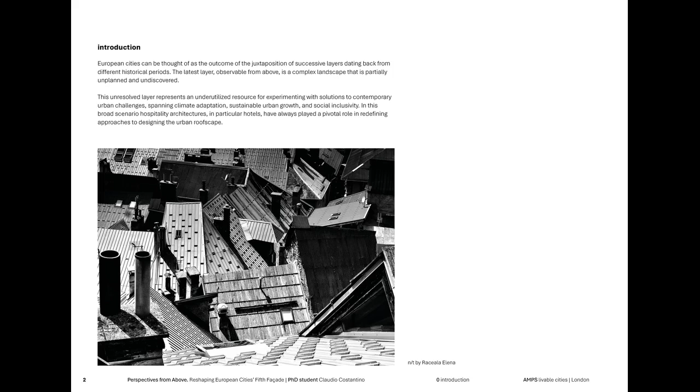We will explore this subject in two distinct main parts. The first section offers a comprehensive analysis of the current state-of-the-art in roofscape design. Through a selection of recent studies, we will examine the potential for transforming the underutilized fifth facade of contemporary cities.

The second part shifts its focus to hospitality projects. By analyzing a series of relevant case studies, we aim to establish a preliminary critical taxonomy. This framework will serve as a foundation for the development of practical guidelines for the redesign of fifth facades in our tourist cities. Our examination will pay particular attention to how these elevated spaces have become a platform for innovative design and the exploration of new social roles within the urban fabric.

This investigation is driven by two central concerns. Firstly, the pressing issue of environmental sustainability necessitates the efficient utilization of existing urban space, thus mitigating land consumption. Secondly, the growing demand for more livable, inclusive, and socially sustainable cities compels us to reimagine the potential of roofscapes.

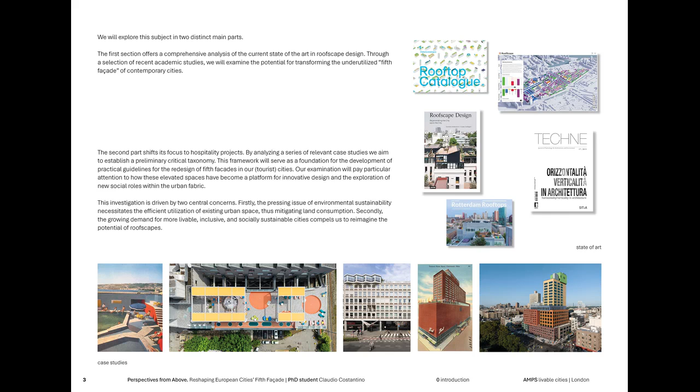State of the art: Gustavo Ambrosini and Guido Callegari in Roofscape Design, Regenerating the City upon the City, provide a survey of city rooftop reuse strategies such as building on and integrating new volumes within existing buildings.

24 case studies illustrate a multiplicity of projects that innovate on traditional typologies by offering multiple ways of living, working, and using public services in the city.

The opening chapters delve into the potential for rooftop living. The authors explore various building types, examining how architects have adapted them to incorporate new uses and spaces on their roofs: historic residences, housing complexes, factories, service buildings.

To further understand rooftop design approaches, the authors introduce three key architectural metaphors. Distance: this concept emphasizes the idea of rooftop living as a detachment from the ground floor experience, offering a unique perspective and escape.

Raising the ground: this metaphor envisions the rooftop as an extension of the ground floor, creating a seamless connection between indoor and outdoor living. Naturalizing the roof: this approach seeks to transform the rooftop into a green haven, blurring the lines between built environment and nature.

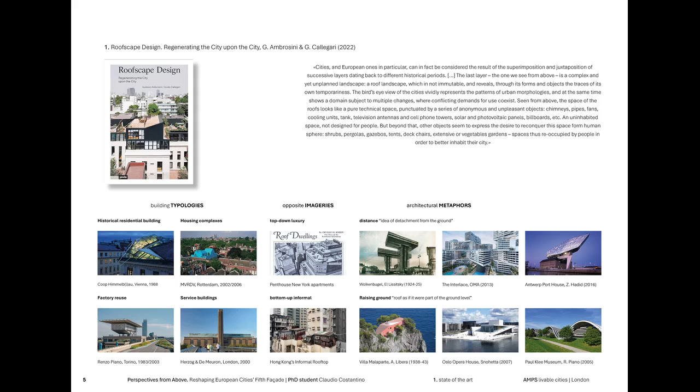Rotterdam boasts a unique urban landscape characterized by 14.5 square kilometers of flat rooftops. Shaped by the city's dynamic past, this roofscape presents a significant opportunity for sustainable development. Recognizing this potential, the Rotterdam municipality commissioned De Urbanisten to investigate the possibilities of transforming these rooftops into multifunctional spaces.

De Urbanisten's research framework categorizes rooftops based on their functionalities, employing a color-coded system, further elaborated by MVRDV years later. Green: lush vegetation provides ecological benefits. Blue: these roofs capture rainwater, mitigating urban flooding. Yellow: solar panels generate clean energy. Red: designed for active human use, these roofs become social spaces.

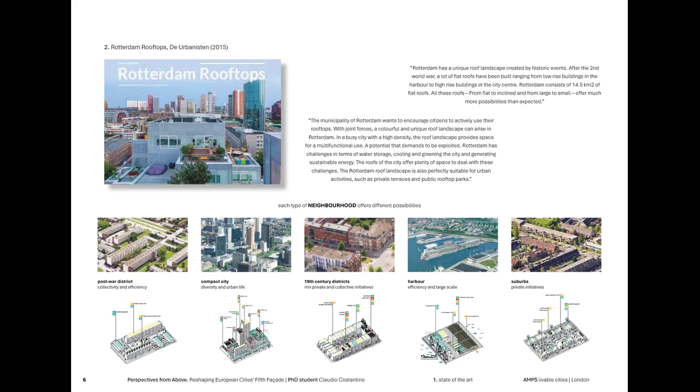De Urbanisten's research extends beyond mere categorization. They link their findings to 5 distinct Rotterdam neighborhood typologies, including compact inner city, where intensive greening or compact social spaces might be most suitable; post-war districts, which could benefit from larger community gardens or solar installations; and harbor areas, where extensive solar farms and ecological solutions are ideal for these vast expanses.

The rooftop catalog presents a compelling exploration of this vast resource. It showcases 130 innovative design concepts for transforming Rotterdam's rooftops, paving the way for a transformative new chapter in the city's development. The catalog presents a diverse range of possibilities, encompassing personal workspaces, sporting facilities, and even cemeteries.

The catalog highlights the strategic significance of rooftop utilization. By maximizing existing space, it offers a powerful solution to the city's challenge of limited land availability. This approach can effectively curb urban sprawl, preventing further encroachment on surrounding rural areas.

The rooftop catalog serves a dual purpose. It not only ignites our imagination with the possibilities, but also delves into the practical considerations. The document explores various construction options and analyzes compatibility with different building types, providing a roadmap for implementation.

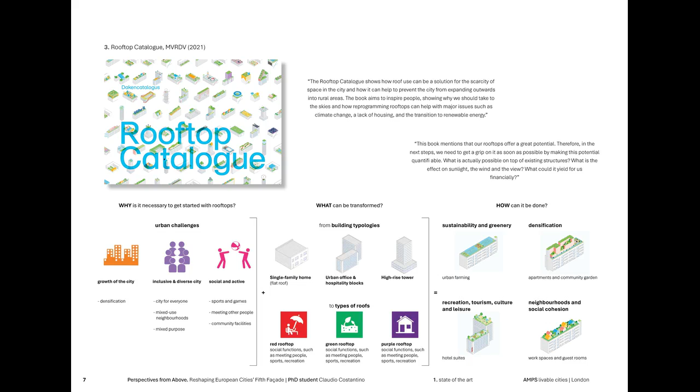While the catalog presents a compelling vision, the presentation acknowledges the need to address practical hurdles. Additionally, it would encourage a multi-layered approach, allowing for the stacking of functionalities like water storage, greenery, energy generation, and public use areas. Building upon a prior collaborative initiative, the Rooftop Catalog, launched in 2021 by MVRDV and the Municipality of Rotterdam in conjunction with Rotterdam Rooftop Days, Roofscape represents the next stage in harnessing the potential of Rotterdam's rooftops.

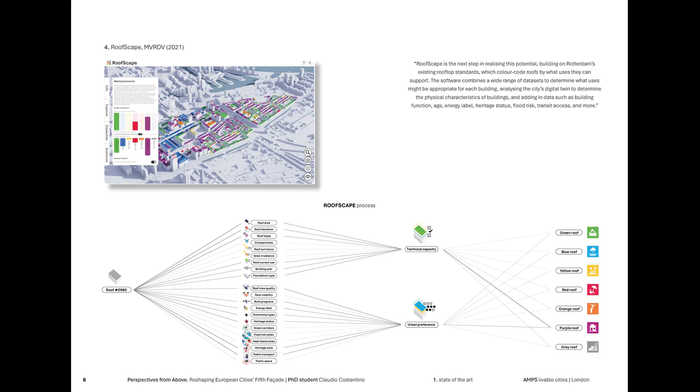Leveraging the city's established rooftop standards, which utilize a color-coded system to denote suitable rooftop functionalities, RoofScape employs a comprehensive data integration approach. This software program analyzes a diverse array of datasets to determine the most appropriate uses for individual buildings. By incorporating the city's digital twin, RoofScape assesses the physical characteristics of each structure. Furthermore, the program incorporates supplementary data pertaining to building function, age, energy efficiency rating, heritage status, flood risk, proximity to public transportation, and other relevant factors.

Rooftop architecture and urban roofscape, designing the new vertical city, explores the potential of rooftop architecture in redefining urban skylines and enriching urban spaces with new functions and lifestyle models. It discusses how verticalization and densification of cities generate unexpected spaces, enhance existing structures, and introduce new functions to rooftops, paving the way for alternative urban models.

However, the process is hindered by a lack of contextual data control and specific interpretative and regulatory tools to relate intervention quality to the landscape dimension. The study highlights international cases demonstrating how requalifying building summits can lead to urban regeneration, reduced urban land consumption, densification, improved built environment quality, and enhanced resilience.

The authors identified four types of rooftop interventions. Replacement: completely replacing existing rooftops with new structures. Interference: introducing visually striking elements that contrast with the surroundings. Integration: harmoniously blending new rooftop elements with the existing context. Dissimulation: concealing new rooftop elements to minimize their visual impact.

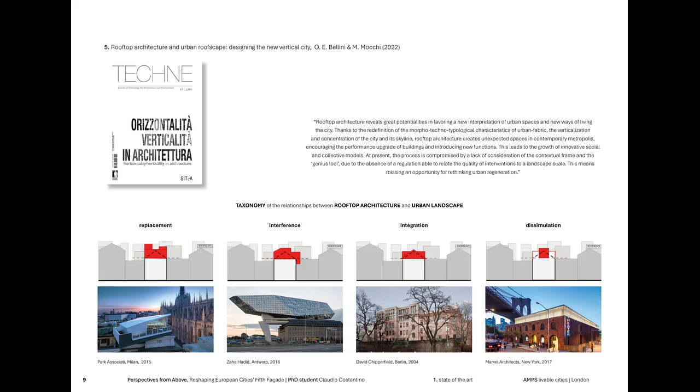The analysis of the current state of rooftop design has revealed a set of recurring themes, both design-related and non-design-related. These themes serve as a foundational framework for analyzing and categorizing the selected case studies.

Usage: rooftop spaces can be broadly classified into two categories. Public rooftops: these spaces are open to the public and directly accessible from the street, often serving as extensions of the urban realm. Private rooftops: these spaces are intended for the semi-exclusive use of the building's occupants, providing residents with private outdoor retreats. Design process: rooftop designs can be categorized according to the approach taken in their conception.

Top-down design: this approach involves a centralized planning process, where the rooftop design is dictated by overarching architectural principles and urban guidelines. Bottom-up design: this approach emphasizes community engagement and participatory design, allowing users and stakeholders to influence the rooftop's design and functionality. Challenges and objectives: rooftop design projects often address a range of pressing societal and environmental issues.

Climate adaptation: rooftops can be transformed into green spaces that mitigate urban heat island effects and promote sustainable water management practices. Energy transition: rooftop installations of solar panels and other renewable energy sources can contribute to reducing a building's carbon footprint and promoting energy independence.

Sustainable urban growth: rooftop spaces can be utilized to enhance urban biodiversity, provide recreational opportunities, and foster community connections, contributing to a more sustainable and livable urban environment. Inclusive and diverse city: rooftop designs can promote inclusivity and diversity by accommodating a variety of uses and catering to the needs of different user groups.

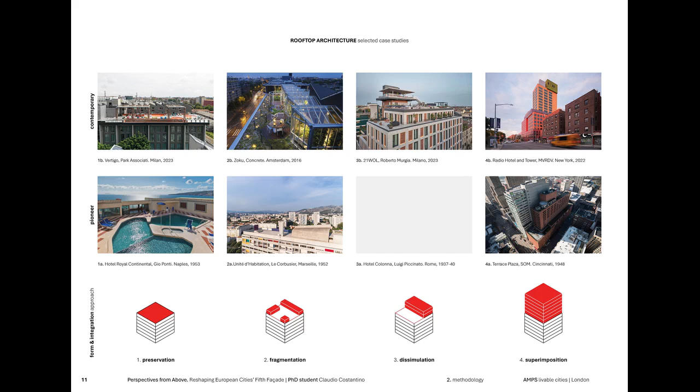The rooftop space, imbued with new social uses, can thus be configured as a place of exchange and inclusion between these two distinct groups. Gio Ponti was called in to redesign the interior and rooftop swimming pool of the Hotel Royal in Naples, whose 1953 architectural design was by engineer Ferdinando Chiaramonti.

The roof was conceived as an en plein air space, giving the architect the opportunity to show what an artificial landscape consists of. Are lakes and rivers rectangular? I want pools in which nymphs can swim.

Within an overall design that is impossible to describe, neither too geometric nor too picturesque, the architect conceives multiple episodes, transforming a limited intervention into an opportunity for a landscape walk. The pool is inaccessible from the streets, surrounded by walls.

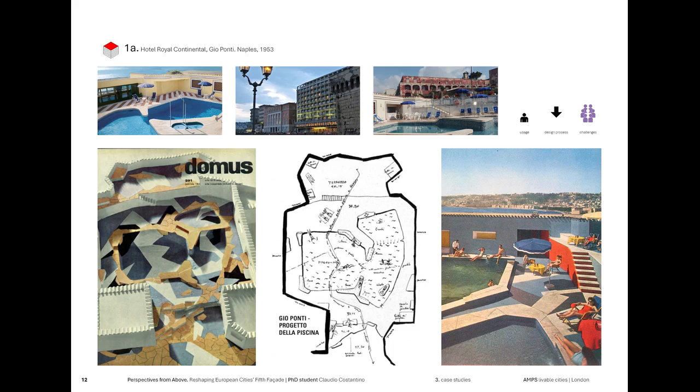It should have been a carpet of Majolica tiles laid on the roof to form the shape of a concrete roof garden, as it appears on the cover of the 1954 issue 291 of Domus. The intention seems to be to isolate the guests of the structure within the artificial landscape created by the architect, an exclusive oasis of sociality.

Park Associati designed this rooftop terrace with the aim of creating a vertigo effect, as requested by the brief. 3 swimming pools with bold colors and a strong perceptual impact characterize the space, focusing on the visitor's experience.

The project is inserted into the surrounding urban context, particularly the former General Electric industrial complex of the 1920s, taking up macro elements such as volumes, solids, and voids, and the relationship between concave and convex.

The project plays on the dimensional contrasts of the elements, some monumental, others reduced and reworked on a minute scale, creating an interplay between the memory of the site's industrial architecture and the playful reading of the intervention.

The rooftop is accessible from both inside the hotel and the street via an external staircase. This allows the space to be reimagined, no longer as an exclusive place for hotel guests, but also as a meeting place for events open to the neighborhood.

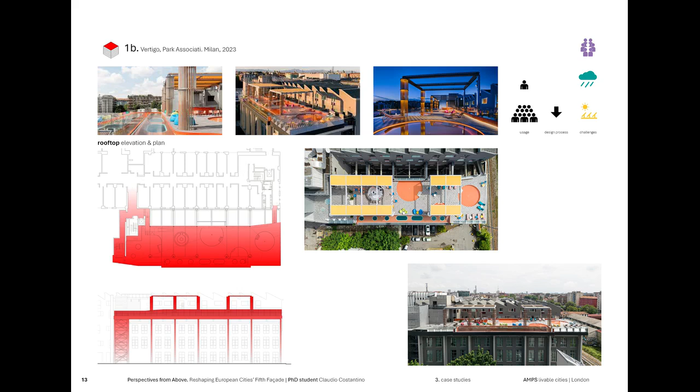Le Corbusier's rooftop on the Unite d'Habitation stands as a groundbreaking testament to his innovative vision of roof space. It transforms an unexpected area into a vibrant hub for residents, offering a diverse range of activities and gathering places within the building itself. While the structure doesn't fall under the traditional category of hospitality architecture, Le Corbusier's original plans included a hotel on the service gallery, and today some of the rooms are available for rent on Airbnb.

Beyond its technical functions, the rooftop becomes an open-air agora. A running track encourages residents to stay active, while a shallow pool provides refreshment for children on hot days, offering a space for games and fun.

Ample seating areas, shaded by lightweight structures, serve as the beating heart of socialization, fostering encounters and conversations among neighbors. However, Le Corbusier's true innovation lies in elevating functionality to an art form. The ventilation stacks, transcending their practical purpose, assume a sculptural, aesthetic value, imbuing the space with a unique identity.

The Unite d'Habitation's rooftop is not merely a collection of amenities, it's an ambitious project that aims to create a vibrant and multifunctional space. It extends beyond the realm of residential living, becoming a beacon for well-being and community life.

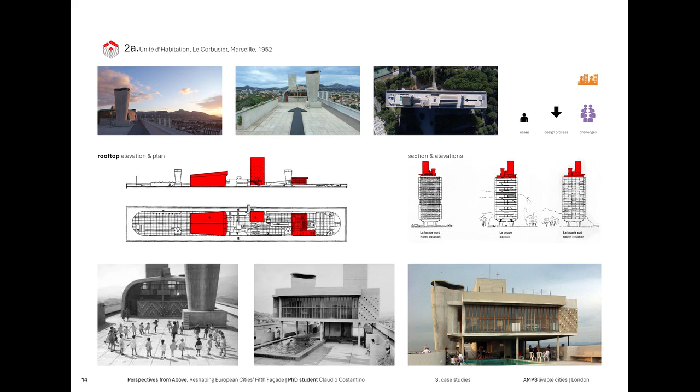Zoku is a flexible home office hybrid that caters to the new generation of business travelers by offering a range of accommodations, including one-night stays and extended stays.

One of the distinguishing features of Zoku lies in its rooftop hall, which has been designed as a collective space for the so-called open-minded professionals. This level is designed as a sequence of interconnected spaces with no clear partition, fostering fluidity and encouraging interaction among the temporary residents. The reinvented traditional greenhouse serves as a transition space that welcomes visitors in the living room.

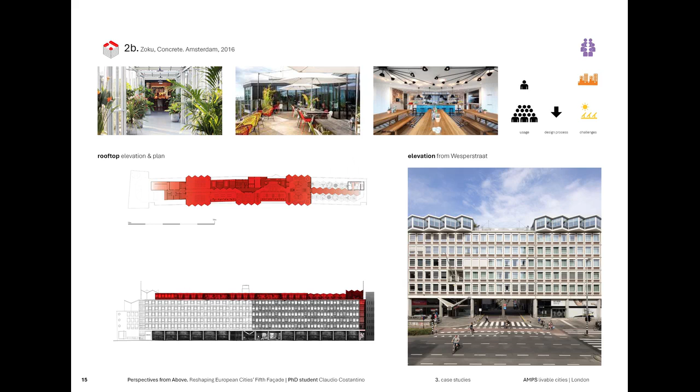Here, around a central bar, guests can first check in and then meet up. As one navigates through the hall, the gaze is consistently forward, creating a sense of anticipation to discover what lies ahead. The progression of these spaces establishes a gradient between more public areas and those that require a certain level of privacy. In fact, behind the open kitchen, work and meeting spaces are located to promote interaction between visitors.

Architect Luigi Piccinato's expansion project for the Hotel Colonna represents an innovative approach to hospitality design for the time. The proposal involved adding 2 levels of rooms to an existing hotel on Via dei Due Macelli, set back slightly from the street line. This setback allowed for the creation of a terrace overlooking the main street, presumably an exclusive meeting place for hotel guests.

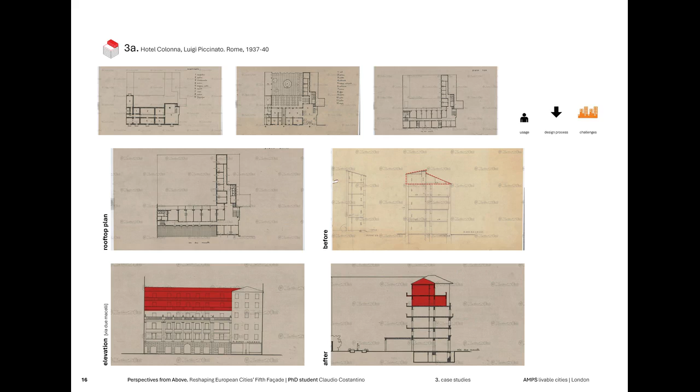As can be seen in many similar interventions today, this addition would not have introduced new functions to the hotel, but would simply have increased the number of beds and open spaces in a heavily touristic area of Rome.

A former telephone exchange in the heart of Milan has been transformed into an innovative hotel open to the city, a new hybrid hospitality format on the Navigli canals.

The structure is developed on 9 floors above ground plus 1 underground on a total area of about 7,000 square meters, has 104 rooms, 2 restaurants, 2 bars, a co-working space and 4 terraces, over 500 square meters of internal common spaces and more than 1,000 square meters of external spaces.

The rooftop features a series of terraces at different levels, each with its own unique character, with a swimming pool and a sky bar, making this location a new iconic Milanese attraction. The setback of the rooftop volume conceals the communal space, creating an intimate and private space for hotel guests who want to escape the city's hustle and bustle for a moment.

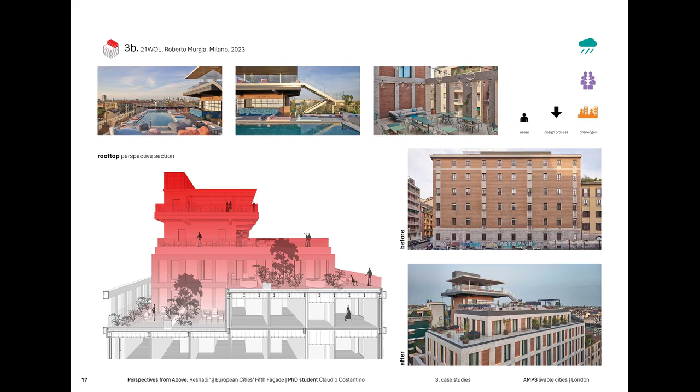The Terrace Plaza Hotel, its original name, is the most important modernist building in Cincinnati and is of national and even international significance. The site was a challenging 90 feet by 400 feet and SOM responded with a narrow, 20-story steel frame skyscraper.

A 7-story base contained 2 department stores, both opening at street level through continuously glazed windows. At the 8th floor, the hotel, a slender setback slab, rose an additional 11 stories from a landscape terrace floating serenely above the street noise below.

This was a revolutionary urban form for that time, imagining a vertical slab atop a horizontal terrace base, with a mixed-use program. The first fully automated elevators in any American skyscraper whisked guests from the street-level vestibule to the 8th floor hotel lobby. The 8th floor had two restaurants, the Skyline Restaurant and the Terrace Cafe, a smaller restaurant and bar adjacent to the outdoor terrace, which served primarily hotel guests.

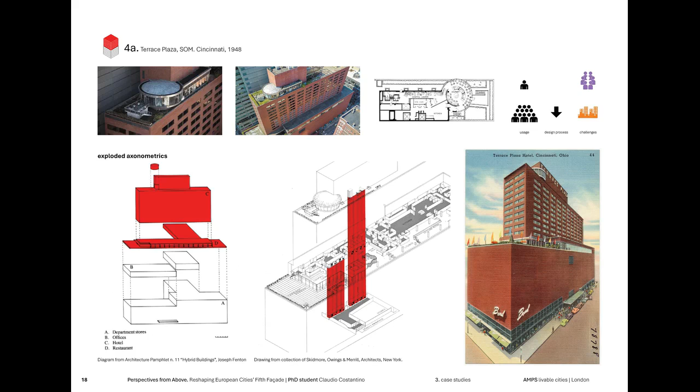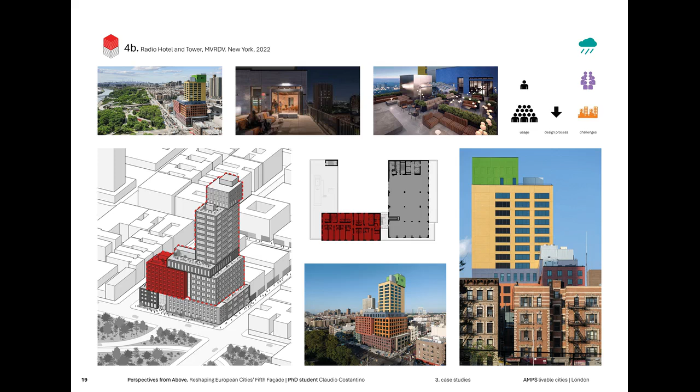The analysis of pioneering rooftop projects unveils a multifaceted perspective on the concept of rooftop spaces. These early designs showcase the diverse roles rooftop architecture can play in enhancing the overall living experience. Rooftops have long been seen as an opportunity to create private sanctuaries, offering a sense of seclusion and escape from the hustle and bustle of the city below.

In Gio Ponti's Hotel Royal Continental, the organic pool provides a tranquil oasis enclosed within a defined perimeter, while the Terrace Plaza Hotel's elevated position creates a sense of isolation from the surrounding urban environment.

Beyond their role as private havens, rooftop spaces can also serve as vibrant social hubs, fostering interaction and community among residents. The inclusion of various amenities, such as swimming pools, lounge areas, and outdoor kitchens, transforms rooftops into communal spaces for socializing and enjoying the outdoors.

This approach is evident in projects like the Terrace Plaza Hotel, where the rooftop terrace becomes a central gathering spot for guests. While many rooftop designs emphasize privacy or social interaction, others focus on expanding the building's functionality. Piccinato's rooftop addition exemplifies this approach, solely aiming to provide additional beds.

This utilitarian perspective highlights the versatility of rooftop spaces, which can accommodate a range of functions beyond relaxation and recreation. It is important to acknowledge the limited attention paid to environmental and energy concerns in these early rooftop designs. Due to the prevailing architectural practices of the time, sustainability considerations were not a primary focus. However, as environmental consciousness has grown in recent decades, rooftop architecture has evolved to incorporate sustainable design principles, minimizing the environmental impact of these structures.

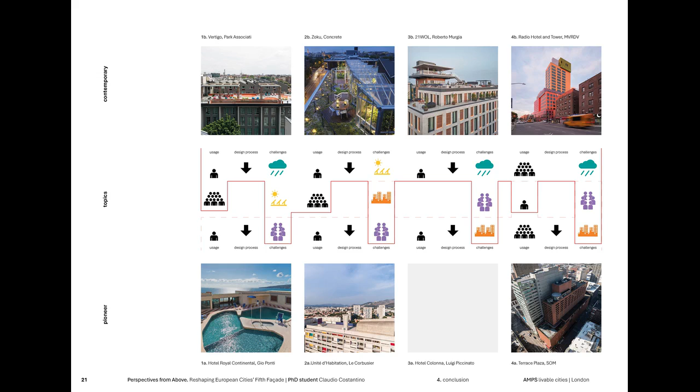In a world facing increasing urbanization and land scarcity, modern rooftop architecture offers a valuable solution. By expanding the usable space of buildings vertically, these projects reduce the need for sprawling horizontal development, thereby conserving valuable land resources. This approach contributes to a more sustainable and efficient use of urban space.

The evolution of rooftop architecture reflects a dynamic interplay between privacy, social interaction, and functionality. From private retreats to vibrant social hubs and functional extensions, rooftop spaces have continuously adapted to meet the evolving needs and aspirations of building occupants.

While the pioneering projects of the early 20th century laid the foundation for modern rooftop design, the ongoing pursuit of sustainability and innovation ensures that rooftop architecture will continue to evolve and redefine the living experience in the years to come.